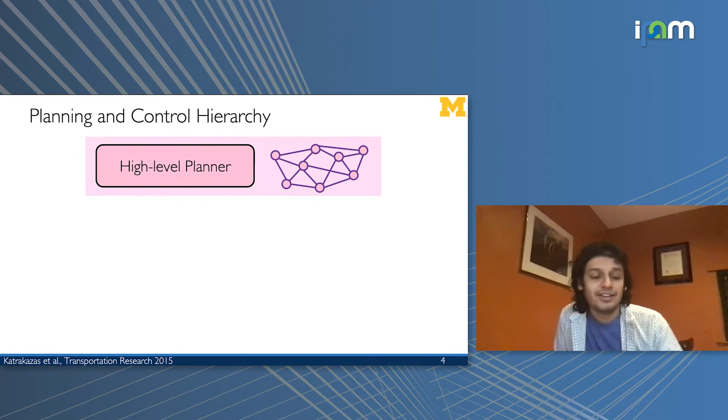And usually planning and control are arranged in sort of a hierarchy here. And the top level of this hierarchy is a high-level planner, which is doing something like a Google Maps style thinking of the world, which is, I go down to Gayley, I make a right, and then I go further down and I get on the 405, et cetera. Well, all those turn-by-turn instructions are handed to a trajectory planner that tries to follow those different types of instructions. And subsequently, that information is passed to a tracking controller, which takes advantage of the powertrain model and all sorts of other stuff to design a controller that is able to follow a particular trajectory.

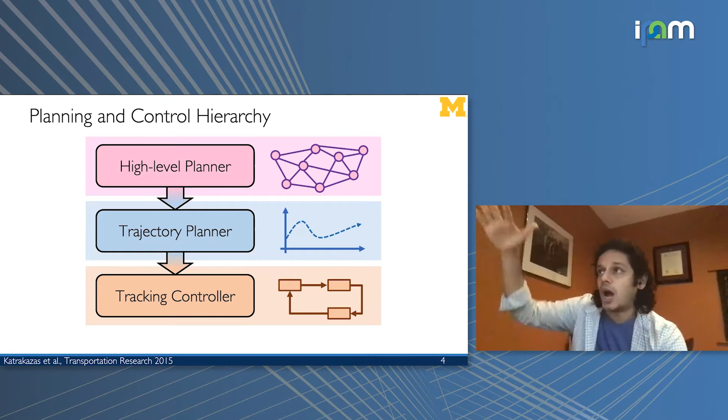The question people usually ask is, why do we think about breaking down planning into these three different levels? And the reason is, planning needs to happen fast. And so if you're in an environment like this one and you just sort of pause and you're thinking about how to do planning, you're just going to decide to never move. You really need to be able to plan quickly.

And planning with a model like a powertrain model, which is really, really complicated, means that you're going to have to manage a few hundred dimensional model while doing planning. And that can be really, really hard to manage while being able to say something about safety and real-time performance. So, given this sort of model, the question is, what do people typically do? And the standard in this area has really been thinking about the trajectory planner and tracking controller layers together.

The way that's typically been done is by using something called model predictive control. And so, for example, the trajectory planner could be generated by some sort of nonlinear model predictive control method, and the tracking controller could use some sort of linear or quadratic programming-based model predictive control scheme that tries to generate a tracking controller that achieves some satisfactory performance.

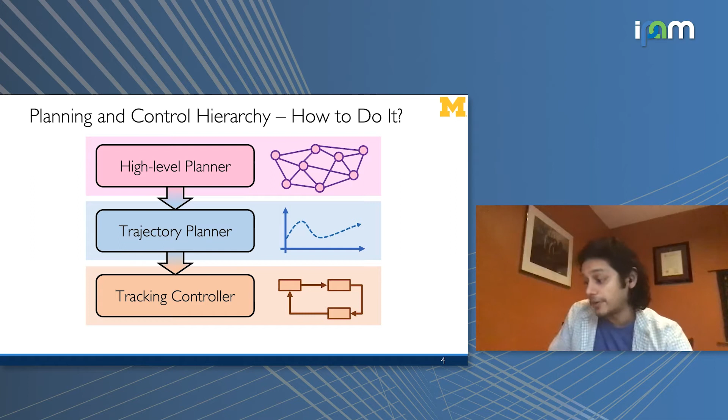In fact, this has been going on for some time. This is actually when I was doing my PhD. It's actually my first time in Michigan. We went up to Sault Ste. Marie, which is a very, very cold part of Michigan. And we were working with Ford back then and doing this sort of planning fully autonomously and really managing those two levels. And this is, I think, doing about 30 meters per second, lane change maneuvers fully autonomously on snow. And the really cool thing is you can get this to work fairly reliably.

The challenge is that sometimes things don't work out really well. And this is me sitting in the back seat now. And in a moment, it's going to go autonomous. And you'll see that actually we're about to crash into a snowbank here. And it's a very expensive vehicle that we just broke. So the question is, how can we start imbuing these systems with some notion of safety?

And typically that's been done at the sort of tracking controller level. And there's been a variety of different methods that have been proposed to sort of accommodate introducing safety while doing path planning. So I'm going to categorize these methods before describing the method that I'm going to spend the rest of the talk talking about. So the first set of methods is called check methods. And what they try to do is to just perform collision checking for a pre-computed trajectory. These have been done in the past by using these types of zonotope methods.

And the way to think about it is as follows. Suppose I have this sort of road and I have a particular pre-computed trajectory. Well, what I can then do is try to follow that trajectory by using some sort of tracking controller, but inevitably there's going to be some error. What I can do then is to bound the difference between my vehicle following that trajectory and the one that actually is realized by using this tracking controller, and accommodate that tracking error.

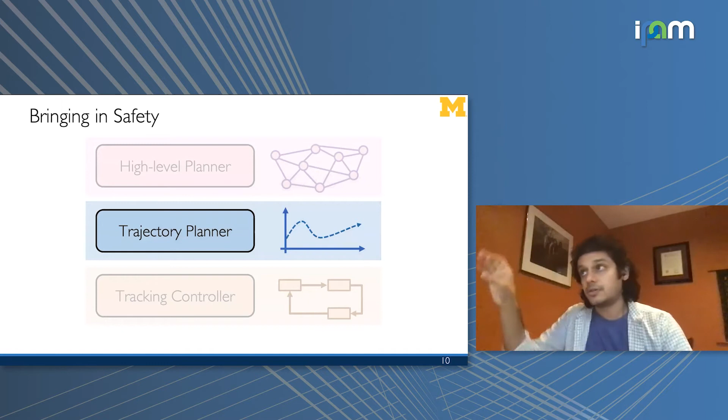So what I'm going to describe here is introducing safety one level higher, and that method is going to live at this trajectory planner level. And I'm going to describe two different methods for doing this. The first one are these funnel library methods. And the next one is this reachability-based trajectory design, which is what I'm going to speak about today. And both of these papers are in IJRR, but this bottom one is the one that's going to be the focus of this work.

How does the funnel library one work? Well, it works like this. I'm going to select a bunch of trajectory parameters on the left-hand side. Each of those trajectory parameters are going to be associated with reference trajectories on the right-hand side. And now what I'm going to do is describe this tracking error by computing a reachable set that looks like a funnel. And essentially I'm going to pre-compute all of these funnels for a finite number of pre-computed trajectories. At runtime, if I have an obstacle that appears in the environment, I'm just going to eliminate examples from this trajectory parameter space and just choose the one that is safe.

Now, the problem with this funnel library method is that the collision check is not verified to operate safely, and I have to pick a finite library. And what this reachability-based trajectory design technique is going to do is reachability across a continuum of trajectory parameters with trajectory-dependent error, and that's going to be done offline. And I'm actually going to show you how to do obstacle discretization to ensure real-time validation, and that's going to run online. And that's the method that I'm going to speak about today.

So that's going to be the three sections of my talk. I'm going to start off by speaking about it in the static world, then the dynamic world, and then I'll conclude.

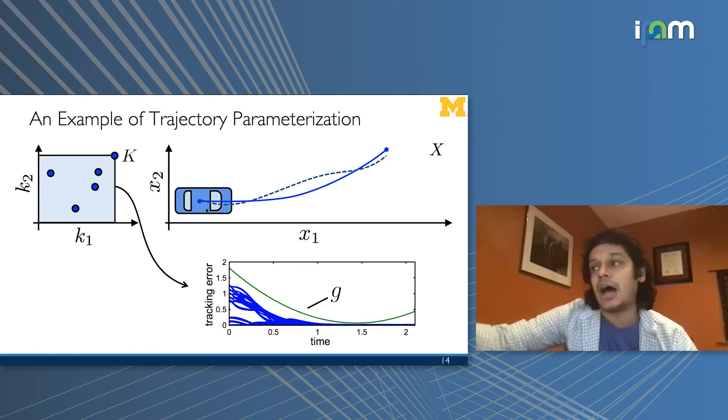And in fact, I can do this for a family of trajectory parameters, which is this light blue set over here on the left-hand side. And each of those is going to generate a possible trajectory that my system is now going to try to follow. So the first thing we're going to assume is that we have a way to bound the worst case behavior across all of the different trajectories that we've chosen, and we can bound it in its integral using this function g. What do I mean?

Well, in particular, if I have my full vehicle model and I have sort of this trajectory producing model, the difference between these two in the two spatial coordinates, x and y, is going to be bounded by this integral of g. Okay, so in fact, this assumption is basically building a type of bisimulation relationship between my vehicle model and this trajectory producing model.

And in fact, what we can show is that there are really nice ways to build this type of g function. You can take a look at some papers that have been written on this topic, including by myself and by Murat Arcak's group, but there are nice ways to actually build this for ground vehicle models, it turns out. In fact, we've actually extended this to quad rotors and other types of vehicles as well.

The important thing is with this g, what you can do is basically introduce a disturbance term. And that disturbance term, if you allow it at any instance in time to take values between -1 and 1, well, in fact, what you can do is compute a forward reachable set for this entire system. And what you can show is that any trajectory produced by this model with this trajectory parameter, if it's followed by the full vehicle model, is going to live inside of the forward reachable set of this whole system. And that whole system's error is going to account for any type of tracking error that may occur while following that trajectory producing model.

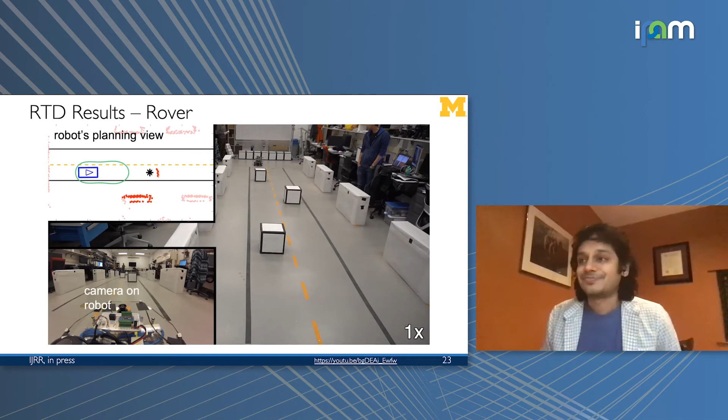So we're going to show a lot of these videos. So I'm going to go through a little bit of a legend here just to make sure everyone is comfortable with this. We're going to have the robot's planning view on the left-hand side here. We're going to have a camera usually on the robot. We're going to have, let's say, a mock road and random obstacles that's in the real world over here on the right. What we'll have are these waypoints that are generated by our high-level planner. Those are, again, these turn-by-turn instructions.

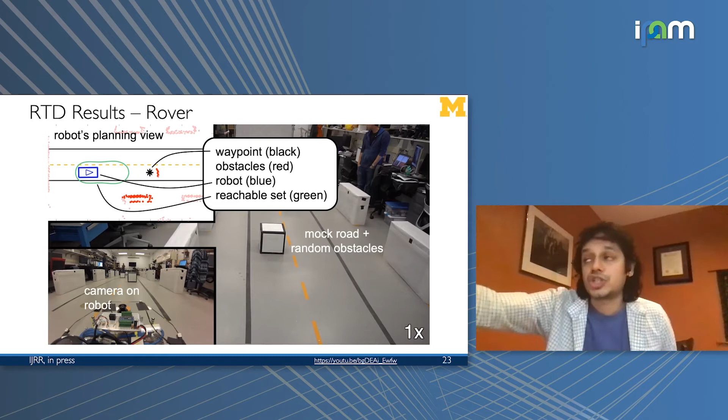We'll always represent obstacles as red. Okay, these will be detected using some sort of perception engine. In this instance, we're using LiDAR. We'll have a robot footprint that's drawn in blue here. And then we'll have the control parameterized or trajectory parameterized reachable set that's going to be drawn in green.

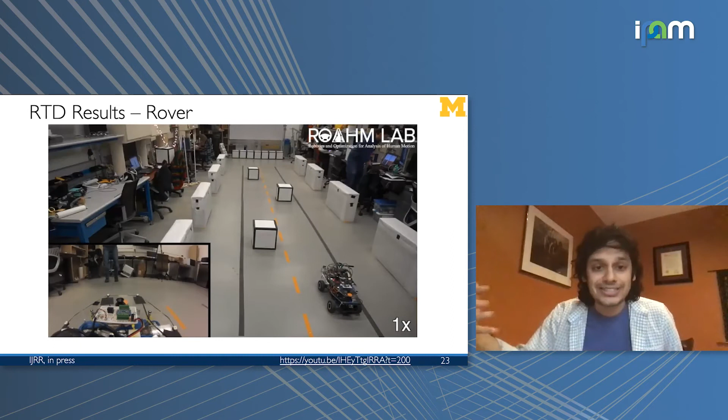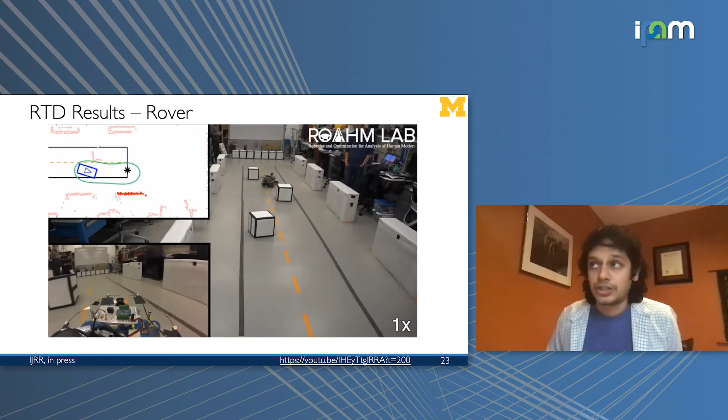Okay, so we'll show you this video that's running, when we used to have a lab. And you'll see, again, all of the planning is happening on board. This vehicle doesn't know anything about the obstacles until its sensor footprint actually gets close enough. And you're going to see, they'll start moving stuff around, and you can still get this vehicle to operate safely. And it's making all the decisions on board the platform at runtime. And it's actually able to ensure safety. And my students will kick around and do some more stuff.

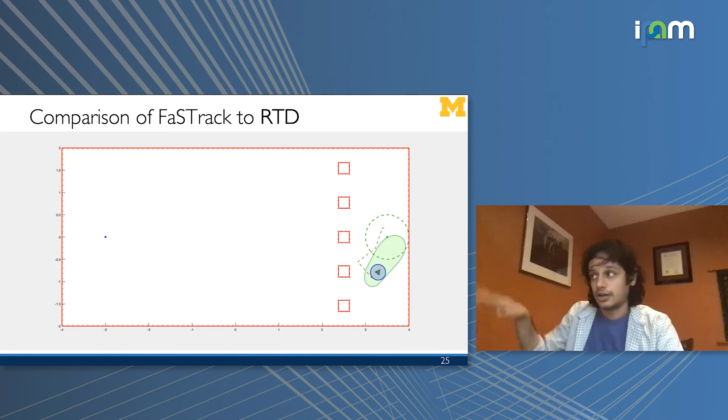Our method, on the other hand, does much better here. The buffer doesn't have to be very big, and so it can actually behave really aggressively here and actually get to a goal. And so we've actually done a pretty thorough comparison here with FaSTrack. Happy to share the code.

Let me, in the last 10 minutes, briefly speak about how we can accommodate dynamic environments. So in this context, I may have a vehicle that's moving. The first assumption I'm going to make, and it's a really strong one, is that the predictions we're handed are conservative and contain the true behavior of the obstacles. Okay, that's a pretty drastic assumption, but if you really want to say something about safety, you need such an assumption. In fact, you really need something more,

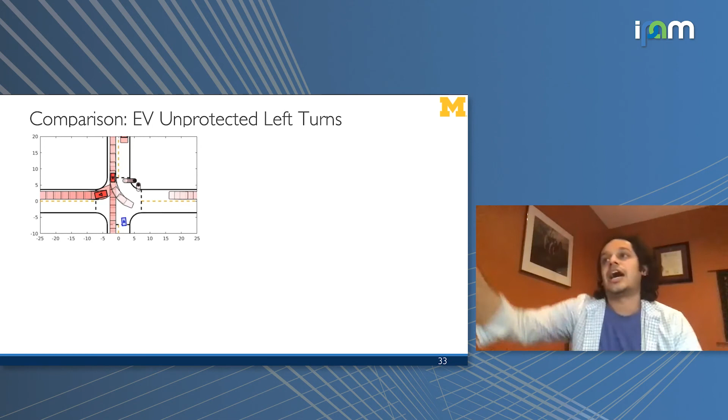And in fact, we've extended it to other scenarios. So here's an example of doing an unprotected left turn, which tends to be pretty hard for autonomous vehicles. So we have these predictions, and our vehicle is able to plan around these predictions and get through left turns like the following. And in fact, we've run it on a bunch of different scenarios.

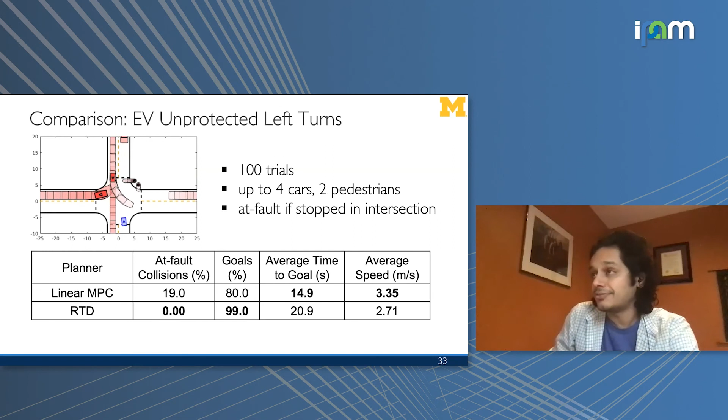So here's some statistics on this particular example. We compared it to a linear model predictive control method. And we can show that we can get to the goal 100% of the time, or nearly 100% of the time, with a fairly high speed. And our time to goal is pretty reasonable. What I'll mention is that we've run a bunch of comparisons here. So I'll just quickly go through this.

And as I mentioned, we've actually been throwing this on the autonomous vehicle that we have here at the University of Michigan. And in fact, we've been working with Ford Motor Company to actually deploy this on their vehicle for broad deployment as sort of like an autopilot feature as they move forward in their vehicle planning calendar. So I'll conclude here by mentioning that we've applied this framework to lots of systems.

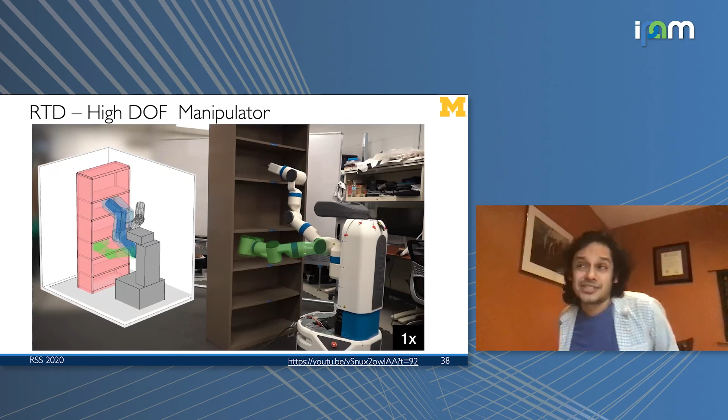So here we go. Usually the thing that everyone says about these sorts of reachability tools, by the way, is that these are really cool, but they don't really work for complicated systems. High dimensional systems tend to be a big challenge for these things. Well, we wanted to prove everyone wrong. So this is a 7-DOF robot. So it's actually a 14-dimensional state space model. We're actually doing the same reachability-based trajectory design here.

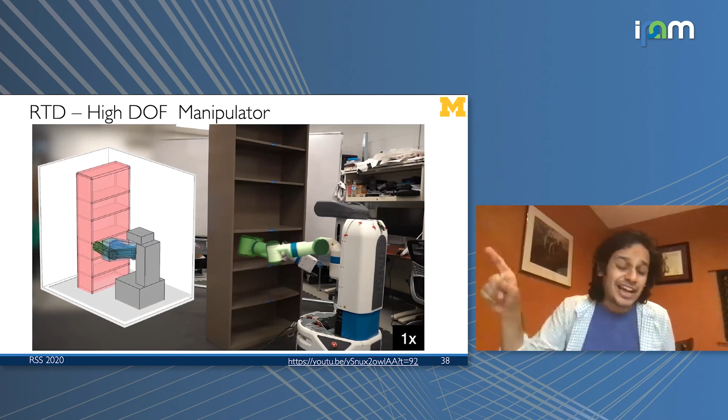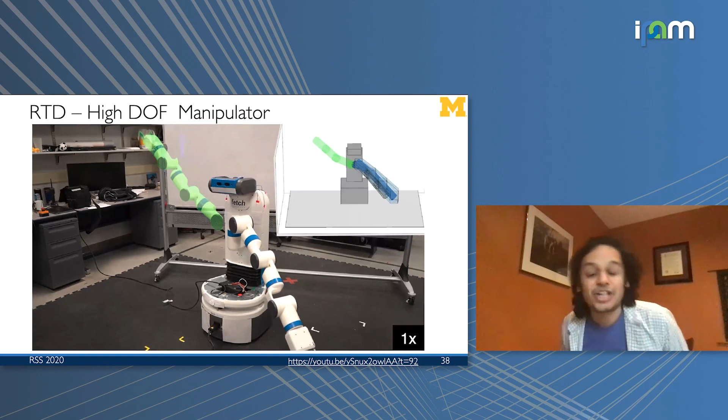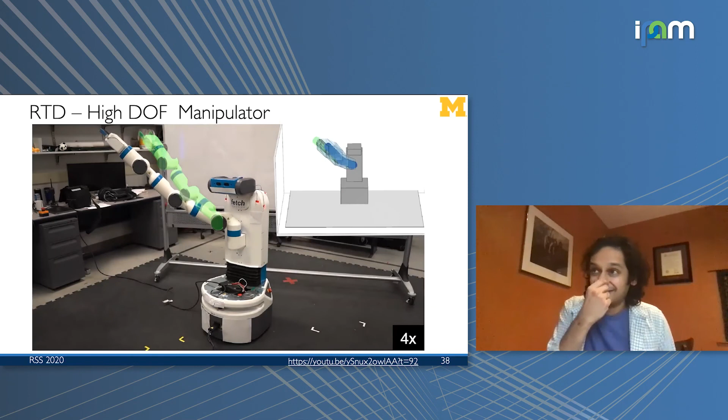I'll stop here by saying, RTD enables sort of collision-free or not-at-fault planning. We've, again, done this across a variety of different platforms. The questions that remain for us in an interesting way are how to think about perception and prediction and how to incorporate models of uncertainty. And I saw Luca Carlone gave a really nice talk, I think on Monday or Tuesday. Luca's thinking about some of these problems, and I think some of the stuff he's been doing has been really relevant and applicable to these kinds of problems.